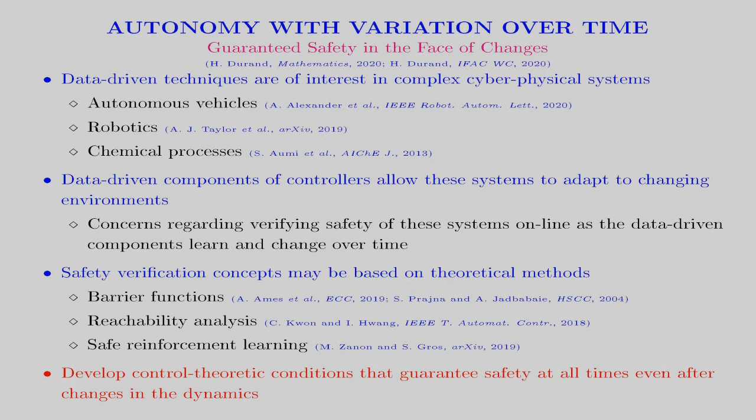Data-driven components of controllers allow such systems to adapt to changing environments. But there have been concerns regarding verifying the safety of such systems online as the data-driven components learn and change over time. One type of control law that we can consider is one that incorporates a data-driven model in the

control formulation to account for changing process dynamics over time, and therefore to allow the controller to update the dynamic model that it uses as the process dynamics change to account for those changes.

Lyapunov-based economic model predictive control, or LEMPC, is a type of advanced control framework that is model-based and therefore can allow for these types of updates to account for variation over time.

We've previously looked at developing an LEMPC that is able to handle online model updates and provided the theoretical conditions that would be required for this.

However, when cyberattacks could occur on an LEMPC designed to handle model updates in this way, new challenges can arise, in particular that it can be difficult to distinguish between the actual dynamics changes and a sensor measurement cyberattack.

And so in this talk, what we'll be looking at is first presenting the type of LEMPC formulation that is able to guarantee stability in the presence of model updates, but the absence of cyberattacks.

And then we'll look at how to update a cyberattack detection strategy in order to be able to handle, in the context of LEMPC, both cyberattacks as well as changes in the underlying dynamics.

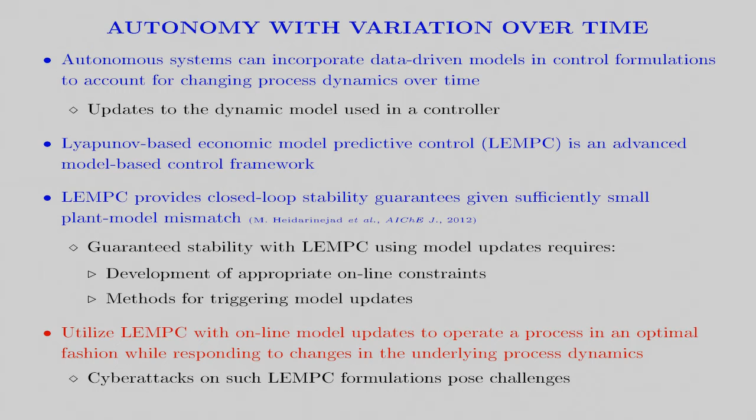In the following developments, we consider the class of nonlinear systems shown here. This is a general class of nonlinear systems with X bar AI as the state, U bar I as the manipulated input, and WI as the disturbance.

The disturbance is considered to be bounded, as are the inputs and the states. We parameterize the different models that can occur over time with the subscript I.

This means that the first dynamic model is used when I is equal to 1, and then when the dynamics change, I will be set equal to 2, and when they change again to 3, and so forth.

We assume that the system is stabilizable in the sense that there exists an explicit stabilizing control law that can render the origin or steady state asymptotically stable, in the sense that there exists a Lyapunov function for which the time derivative is negative along the closed-loop state trajectories under the control law.

For each of the different process models, we define a stability region, omega rho I, which is a level set of each Lyapunov function where the state constraints are met.

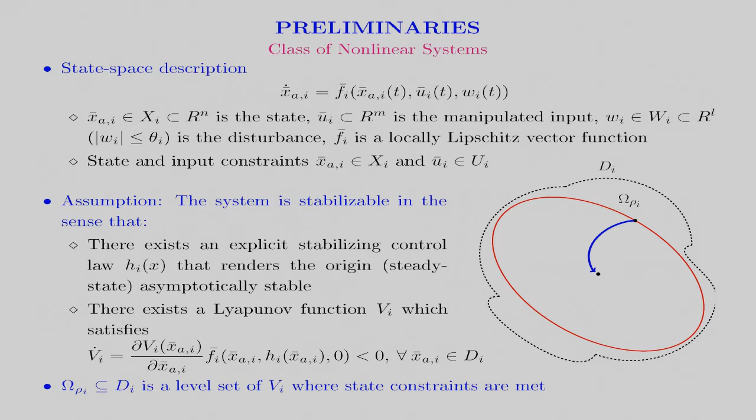The second set of systems we consider are those describing the empirical or data-driven models that will be used by the controller, which are characterized here.

The nonlinear empirical system is also considered to be stabilizable in the sense that there exists an explicit stabilizing control law, HNLQ, for the qth data-driven model that renders the origin or steady state of the empirical system asymptotically stable, such that there exists a Lyapunov function v hat q, which decreases along the closed-loop trajectories of the empirical system under HNLQ for all states in a neighborhood DNLQ of the origin of the empirical model.

We define a region omega rho hat safe q within DNLQ as a level set of v hat q in DNLQ where the state constraints are met. We also define a subset, omega rho hat q, of this region, omega rho hat safe q.

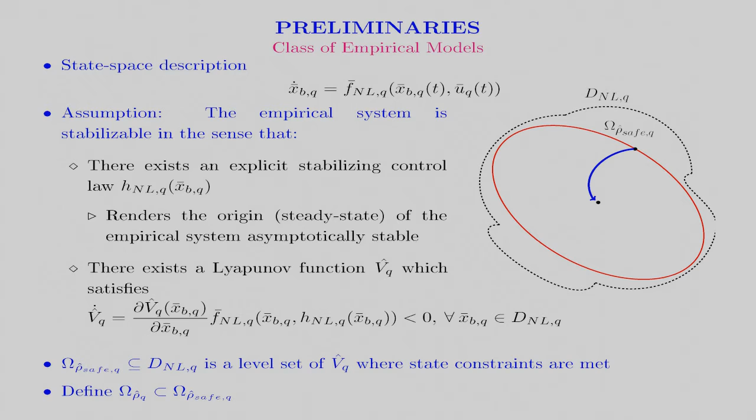We consider that M sets of measurements are continuously available. There is measurement noise, but it's bounded. In addition, a deterministic observer is assumed to exist for each of the M sets of measurements with the form shown here.

For this observer, we make some assumptions, including that there exists a time after which the estimation error is lower than a certain bound.

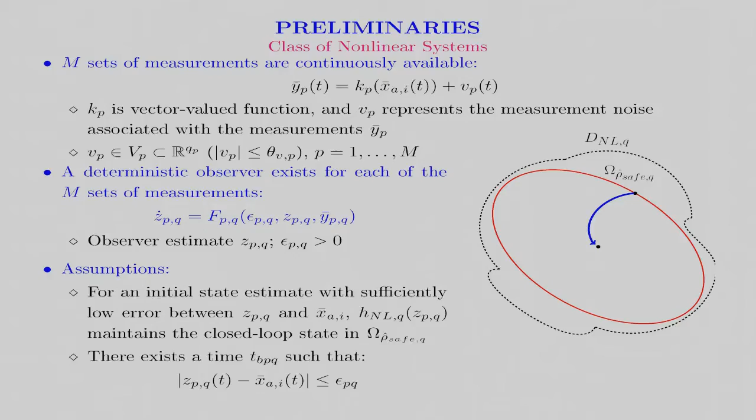With these models defined, we can now present the general formulation of the Lyapunov-based EMPC, or LEMPC. This is a two-mode control formulation.

The Mode 1 constraint is highlighted here in red, and it requires that the state predictions be maintained within omega rho hat E1. Under sufficient conditions, this constraint guarantees that the closed-loop state is maintained in omega rho hat 1.

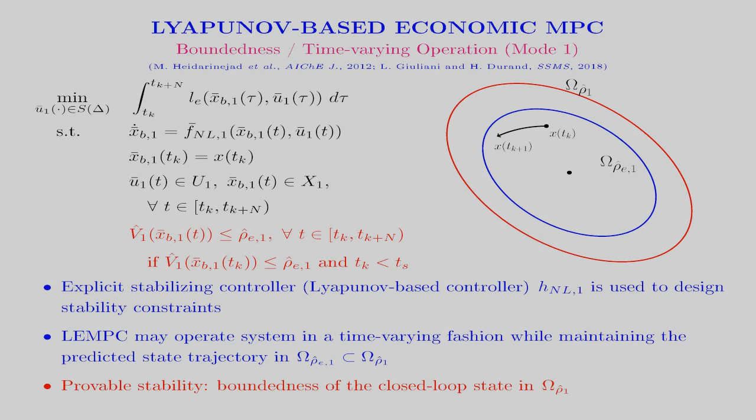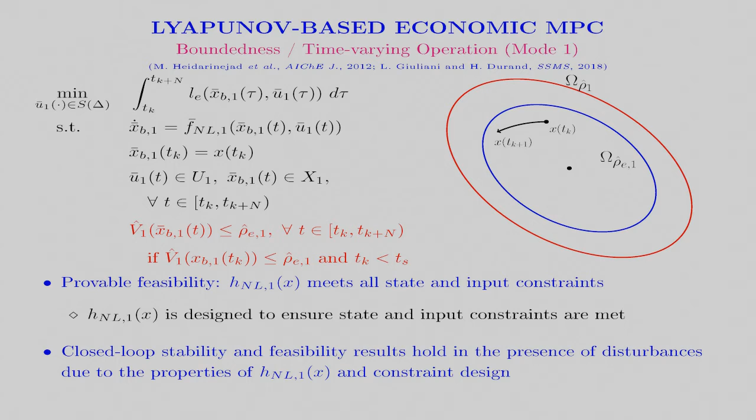This Mode 1 formulation of LEMPC is always feasible. The explicit stabilizing or Lyapunov-based controller h_NL1, implemented in sample and hold, is a feasible solution at every sampling time. This formulation also has a level of robustness to disturbances or plant model mismatch.

The second mode of operation of LEMPC is shown on this slide, with the Mode 2 constraint, or contractive constraint, highlighted in blue. This constraint forces the LEMPC to compute control actions that decrease the Lyapunov function and could decrease it to a neighborhood of the steady state.

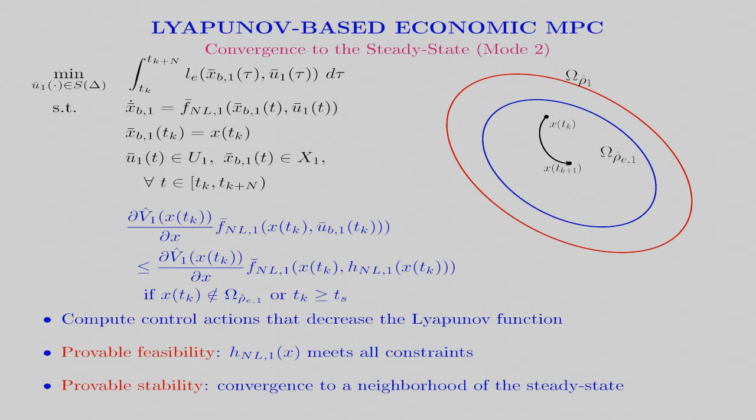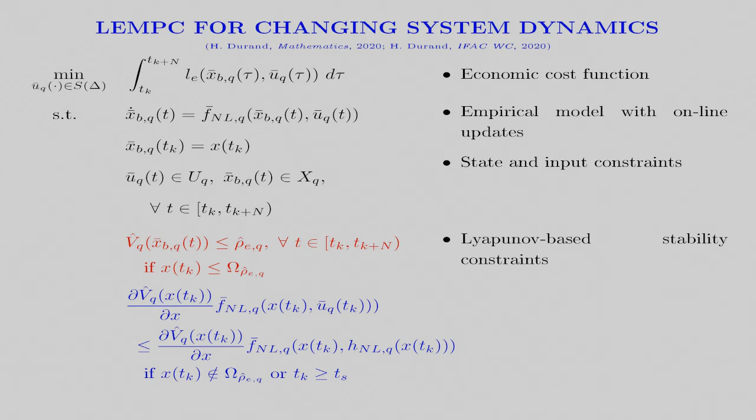The prior work described guarantees for LEMPC that with a data-driven model, closed-loop stability and recursive feasibility can be obtained. Here, to consider anomaly handling for LEMPC with safety guarantees in the case that the underlying process dynamics can change, making the empirical model also change, we allow the empirical model used in the LEMPC to be updated over time.

We note that the closed-loop stability and feasibility guarantees obtained in the case that the model is not updated rely on the accuracy of the empirical model. Changes in the underlying process dynamics may warrant online model updates, but also could lead to more significant plant model mismatch at certain points in time, with the potential that the closed-loop state could leave the stability region.

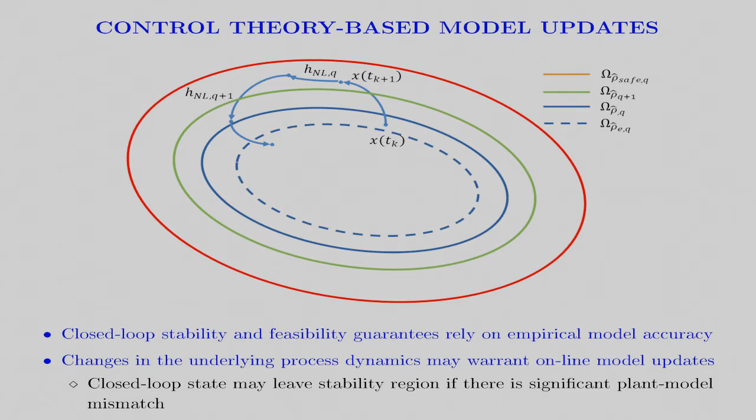Therefore, to handle the underlying dynamics changes, the LEMPC for anomaly handling is designed to maintain the closed-loop state in omega rho hat Q, which is a subset of omega rho hat safe Q. This ensures that when the closed-loop state at x of tk leaves omega rho hat Q due to a process dynamics change, there is still time before it leaves omega rho hat safe Q.

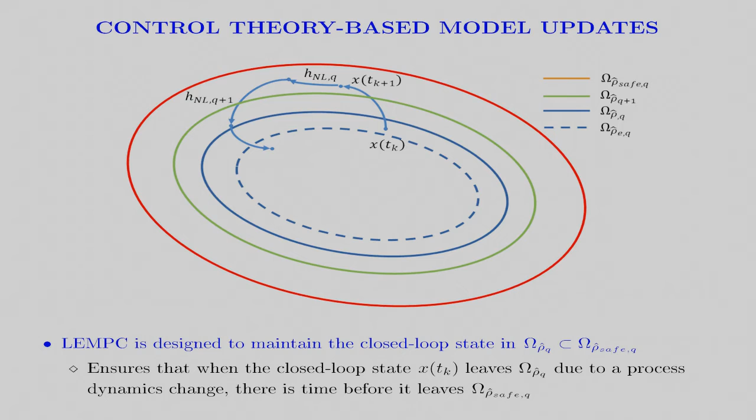This leads to the following implementation strategy. The system is operated under LEMPC until x of tk is no longer within omega rho hat Q. At that point, it is detected that the plant model mismatch has become large enough to potentially compromise stability.

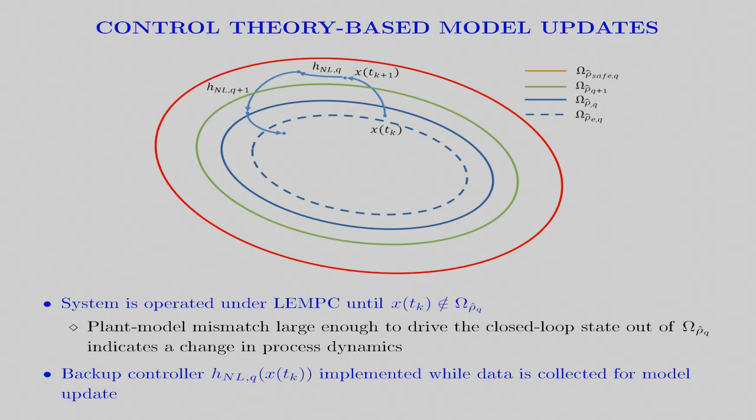In addition, this detection mechanism of seeing that x of tk has left omega rho hat Q is used to indicate that there has been a change in the process dynamics. Via the implementation strategy described, we are able to develop conditions under which closed-loop stability is maintained even in the presence of changes in the underlying process dynamics.

However, those results do assume that the state measurements are accurate. One of the potential sources of inaccurate state measurements is an attack on the control system sensors, which could occur to impact safety or performance. These attacks could be difficult to detect.

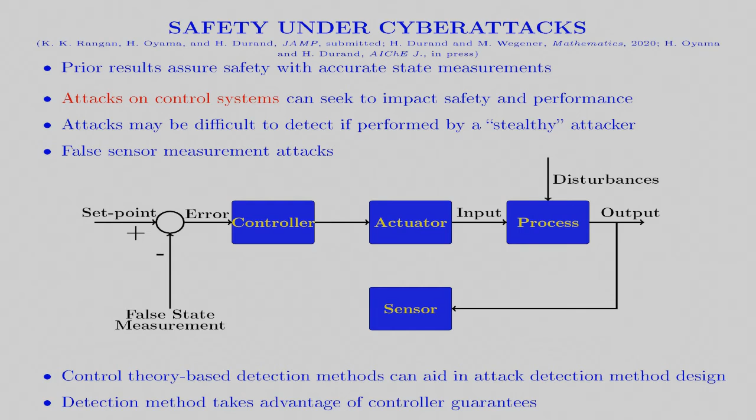The manner in which they would occur is shown in this figure, where we see that a typical control loop could be broken in the sense that a controller no longer receives a measurement from a sensor and instead receives a false state measurement. If some type of false state measurement was injected into an LEMPC, it could be difficult to tell the difference between the cyberattack and the change in the process dynamics.

In terms of methods in the case that we have no changes in the process dynamics, we have previously developed 3 different concepts for utilizing LEMPC to attempt to detect attacks and to handle them. These have included an LEMPC with random control law modifications to probe for cyberattacks, an LEMPC that uses state feedback as well as state predictions for detecting the attack, and an output feedback LEMPC that uses redundant state estimators to detect attacks.

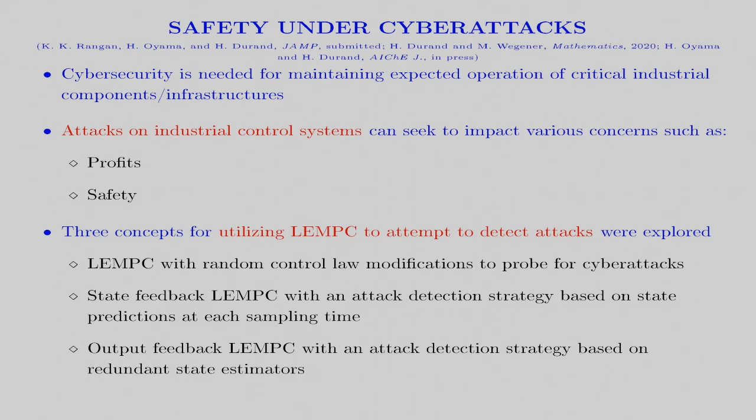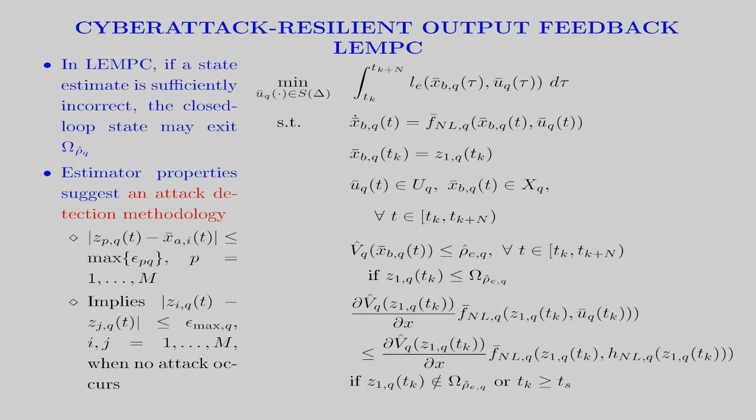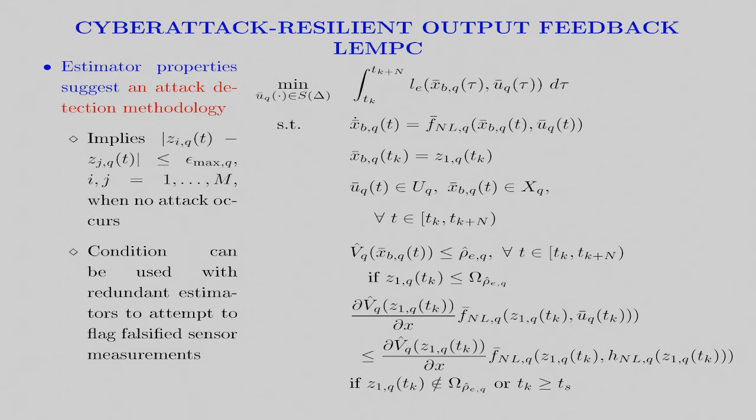This suggests an attack detection methodology, in which the difference between two estimators is checked at every sampling time. When there is a difference between those estimators larger than the bound that should be there, we can flag that as a potential cyber attack.

So that provided an example of a way that LEMPC can be integrated with attack detection strategies in order to guarantee safety in the presence of attacks if there are no changes in the process dynamics.

However, some of our methods for integrating attack detection with LEMPC have relied on state predictions as well as state estimates. Both of these are model-based. This means that when the dynamics change, the models used in predicting or estimating become less accurate.

Similarly, when a cyber attack on the sensors occurs, the state estimates or state predictions will also appear to be less accurate. This means that either a dynamics change or a cyber attack could cause the cyber attack threshold used in detecting whether an attack has occurred to be breached.

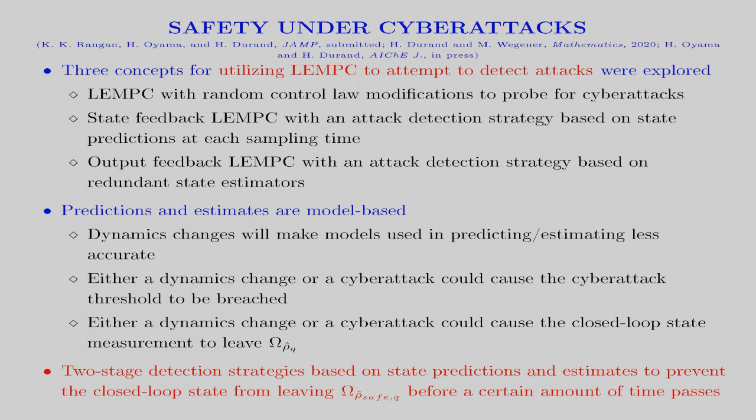In addition, either a dynamics change or a cyber attack could cause the closed-loop state to leave the region omega rho Q. To handle this, we developed a two-stage detection strategy based on the state prediction and estimate methods, to prevent the closed-loop state from leaving omega rho safe Q before a certain amount of time passes.

In the two-stage detection strategy, if the closed-loop state leaves omega rho Q, or if an initial detection threshold is reached, we both reset the detection threshold and prepare to re-identify the model. This allows us to handle the ambiguity in whether the first threshold breach is due to an attack or a model change.

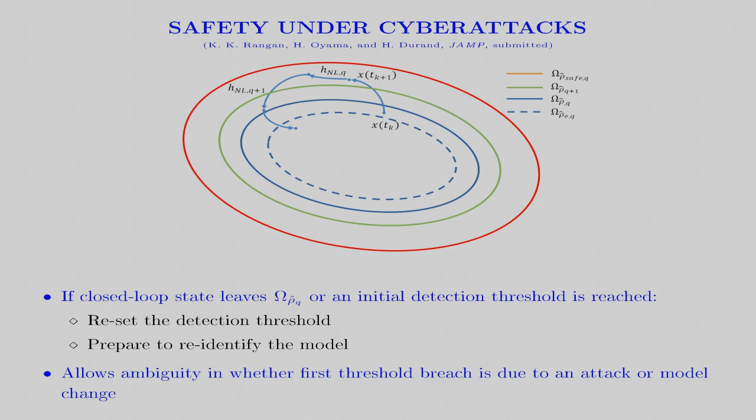With this updated implementation strategy, we are now able, in the case that we use state predictions as part of our detection strategy, to develop sufficient conditions which maintain the closed-loop state within omega rho safe Q for at least one sampling period after either an undetected attack or a model change.

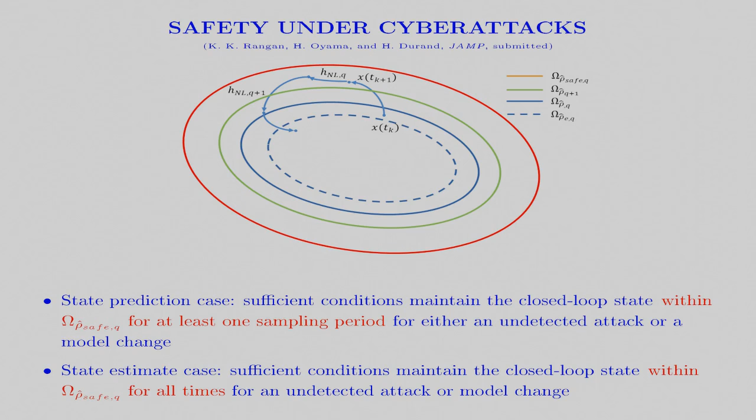In the case that we use the state estimation-based attack detection technique integrated with LEMPC, we are able, with the updated implementation strategy, to develop sufficient conditions which maintain the closed-loop state within omega rho safe Q for all times, for an undetected attack or a model change.

To demonstrate the proposed methodology, we show a chemical process example. In this example, a continuous stirred tank reactor with a second-order A to B reaction is utilized. The control objective is to optimize the process economics while maintaining the closed-loop state in omega rho Q safe.

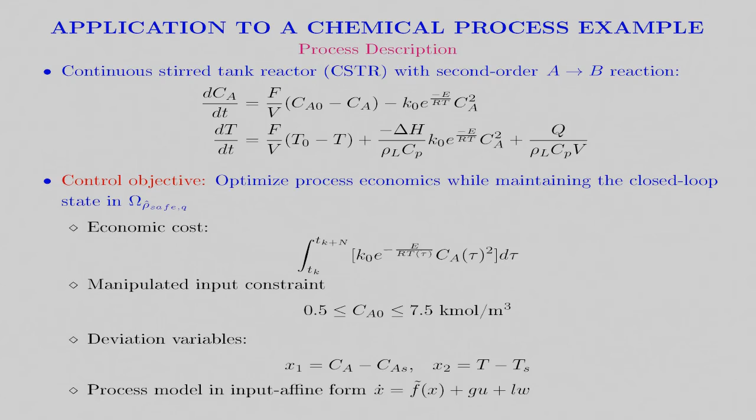We consider a Lyapunov-based controller and quadratic Lyapunov function. The LEMPC in this case receives full state feedback, but there is process noise, meaning that the state feedback does not provide a perfect state measurement.

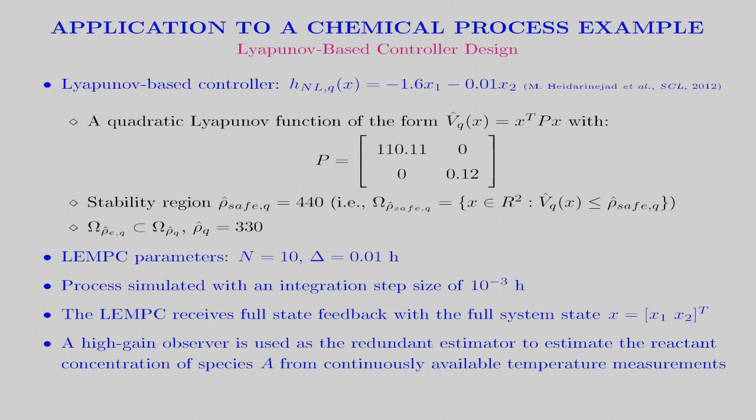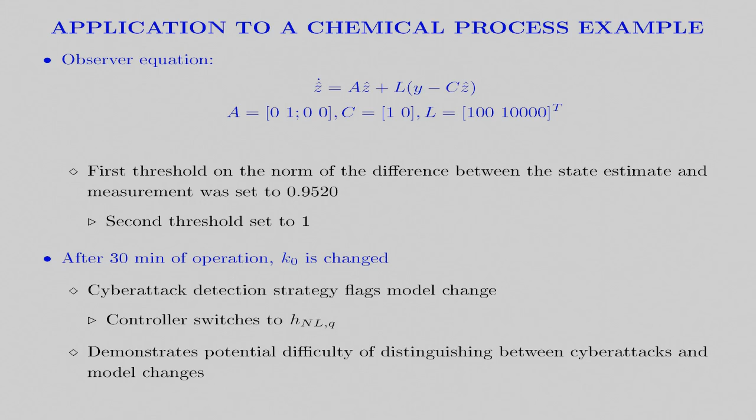The first threshold on the norm of the difference between the state estimate and measurement was set to 0.9520, and the second threshold was set to 1. After 30 minutes of operation, we change the value of K0, which is used in the reaction rate law. This corresponds to the change in the underlying dynamics.

The state space plot for 2 hours of operation is shown here, where we see that even after the change in K0, the closed-loop state never left omega rho safe Q or omega rho Q.

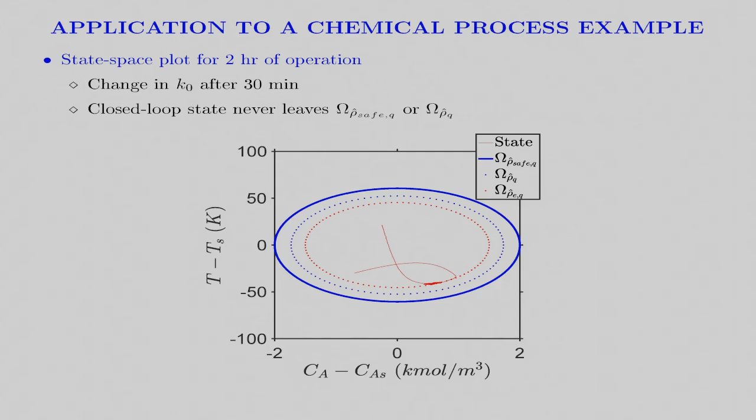In conclusion, this work developed a control and detection strategy that can handle both changing process dynamics as well as cyber attacks on the process sensors. It does not require all cyber attacks and dynamics changes to be definitively distinguished.

The chemical process example demonstrated the concept that it could be difficult for a pre-designed detection algorithm for cyber attacks, or a pre-designed detection algorithm for model changes, to necessarily distinguish between those two.